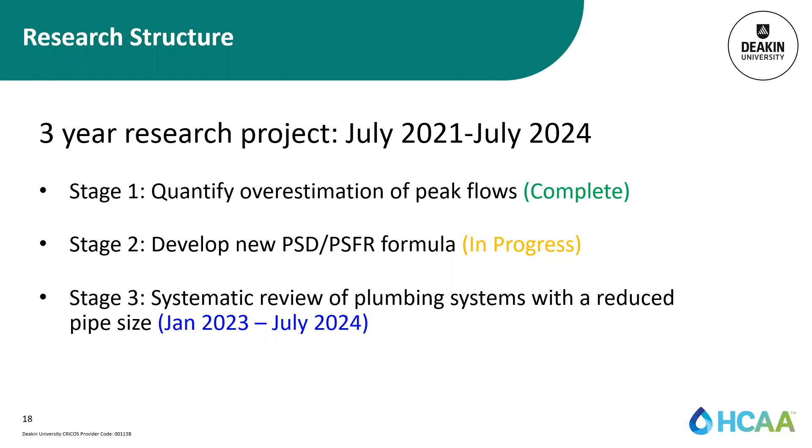Just a recap of stage 1 for those that haven't seen the results yet: we've monitored the water demand for over a year now in 4 buildings—3 primarily residential and one mixed-use commercial and residential. The results are pretty evident, as most of you probably already suspected, but we've been able to quantify that the Australian standard overestimates between 2 to 3 times the actual flows experienced in buildings during peak periods of water consumption.

We also did a few case studies looking at comparable international codes or methods for pipe sizing. We found that the DIN standard and the newly developed IAPMO water demand calculator were probably the most accurate. However, they tend to underestimate peak flows, which from our perspective may not be a good thing, especially when going down to smaller pipe sizes—a small change in demand can have a big change in head loss. So there's a caution when adopting different plumbing codes.

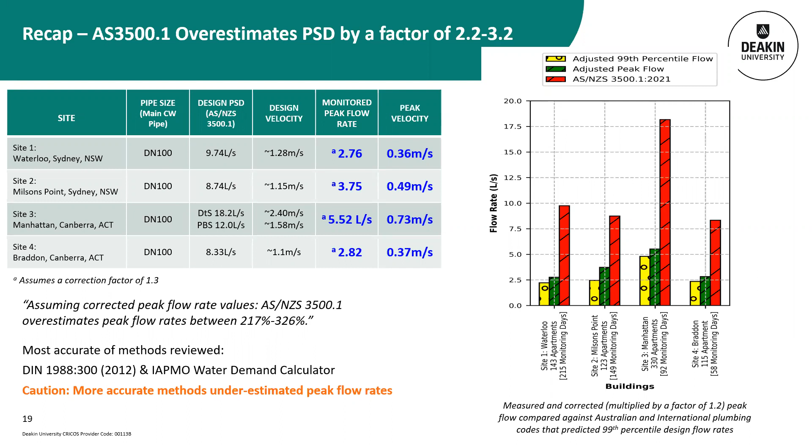Just a review of the publications—it seems like a long time now, but we've got some really good publications across a number of mediums. The first to come out was the ABCB Student Scholarship Report, which summarized the water demand data and did some hydraulic modeling comparing an as-sized system and an improved sized system, shedding some light on what the changes might be in the hydraulic conditions.

In addition, we also submitted a paper to the Ozwater Conference in 2022. Although it wasn't successful, it was nominated in the top 12 papers for the conference. We've also done an Australian Water Association interview based on our work to shed more light, so there's probably more of a cross between the civil side and the building services side, now starting to recognize that the systems are intertwined.

Just last week, a really big milestone from my perspective for my PhD studies is that the first peer-reviewed article was published in the ASCE Journal of Water Resources Planning and Management, a Q1, pretty high-end journal in the US. The paper is also open access, so anyone can access it—no paywall. To coincide with that peer review, we've done a SparkNotes version, an article published in The Conversation, essentially summarizing the research to date, the impacts, and the research needed moving forward.

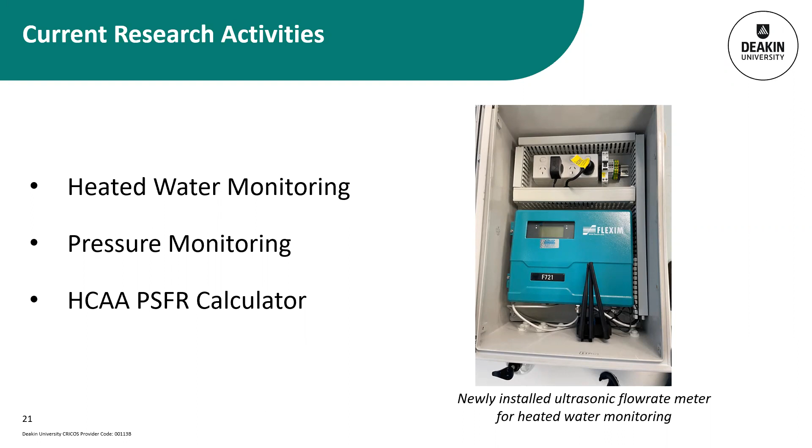Just to give a quick overview, this monitoring only began last week. We're monitoring in one building, looking at how hot water is consumed in conjunction with cold water, and hopefully we can spread this across more buildings later on.

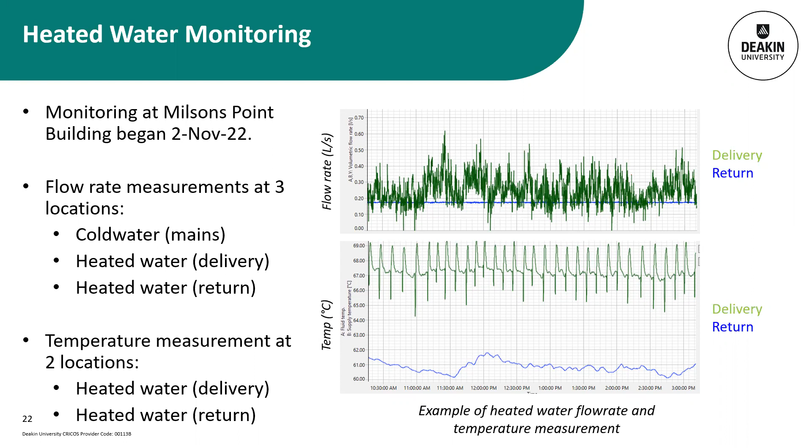In a similar fashion, I've got a pressure transducer and a water use log in my own house, trying to understand how each fixture in a normal household behaves from a water hammer or transient event perspective. There's some interesting findings already - successive events can raise the static pressure within the building, and we also see quick spikes. The charts show, in color, an hour of pressure monitoring.

Across in my house, you can see those spikes every now and then - they're a water hammer event associated with a mixer, washing machine, or similar. So the water hammer is quite significant inside an apartment or a normal single dwelling. I've just recently moved into a 6-unit block, 2 stories, and the pressure profile there is a little bit scary.

So I've left that off the chart at the moment - it got up to about 14 bar, or 1400 kPa. I think there's something going on with the heated water system.

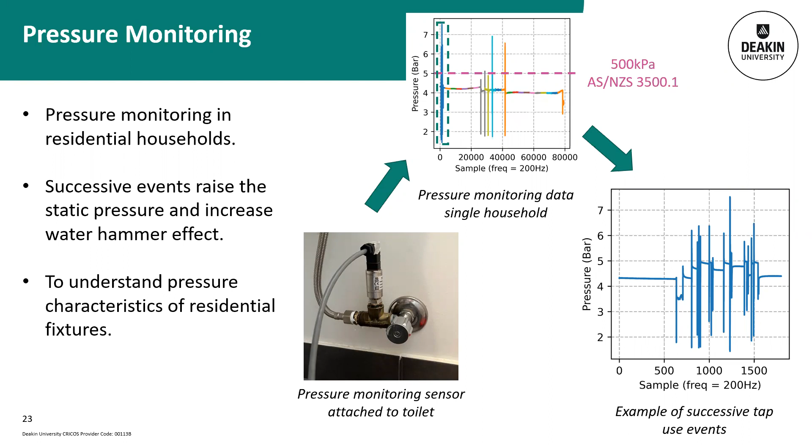Now probably the one everyone's more interested and keen to see: in the coming weeks, we're hoping to release a beta version of a spreadsheet for the association to use and trial, and do a comparison with other pipe sizing methods. We've adopted similar formulas to the IAPMO water demand calculator, but we've actually developed our own p-values, or probability of fixture use, derived from Australian water use data, along with a few little tweaks to the implementation.

The p-values will be a function of both building occupancy and the size or number of apartments at the same time, because we found that the p-value for a fixture isn't a linear or static value - it changes depending on the size of the building.

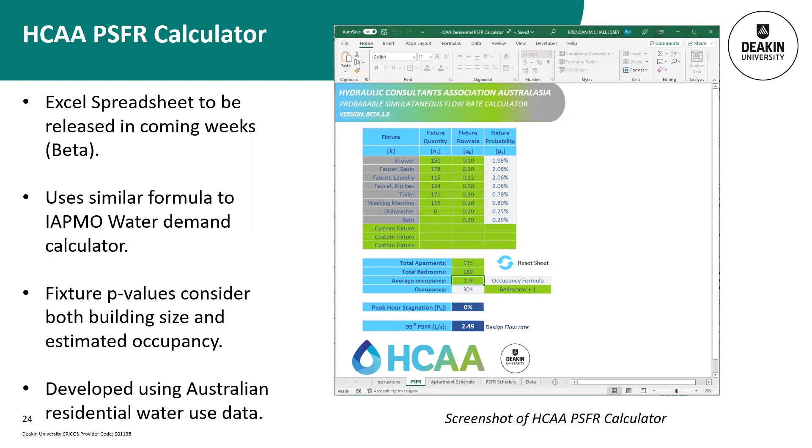To give some insight into how it's performing, we've completed a benchmark study, selecting a few different pipe sizing methods. The red line on the left chart is NZS 3500. The blue line is the newly developed method we've got in the works. There are a few others at the bottom with DIN and the IAPMO water demand calculator. You can see they're very similar, but IAPMO and DIN struggled at larger building sizes and tend to underestimate by around 50%.

As a general rule, it's around 25 to 33% of current flows estimated by AS 3500 part 1.

We've also conducted a case study of 4 buildings and sized appropriately for the cold water there, getting some pretty good results with a small degree of overestimation between 7 and about 36%. Results are looking promising, but we need to validate this further with monitoring more buildings and more water use data.

So it's a call out to industry - if anyone knows of projects that might be interested in installing a water meter, please get in touch. I know Tom's been doing some initiative with green buildings to try to get innovation points and get water meters on buildings that way. The more data the better from our perspective, that's how we learn.

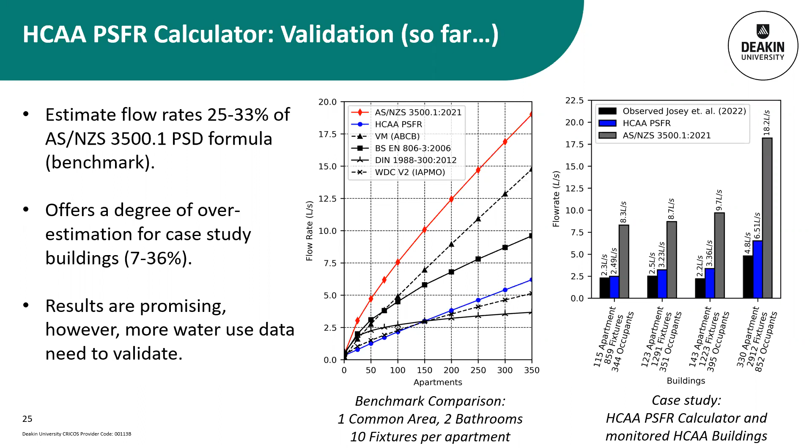So that's it from me. Is there a quick time for questions, or if not, you can come and find me afterwards and we can have a chat. But before people ask questions, I'll just touch on...

Just to give everyone a little bit more detail. The new hot water meter is one we talked about earlier this year, late last year. It costs about $8,000, and the association paid for it. It's the same German-branded water meter that we put on the cold water, but the cold water meters are about $4,000 per building.

So the old meters would do 5-second data, where the new hot water meter, which we put on the cold next to the older water meter to compare the data - these are all things Brendan didn't touch on - it will do 10 readings per second, so it's much more accurate.

That hot water meter filled up the memory bank, which is quite large, in 2 days, because we were doing sort of millisecond data basically. Now we're going to drop it back to 5 seconds so that it can last 14 days instead of somebody having to go and download it every 2 days.

Brendan, everyone probably heard over the last few years, but basically we're sponsoring his PhD. We're paying half of the cost with Deakin, so that's $33,000 a year, to give everyone a bit of insight into what we're doing.

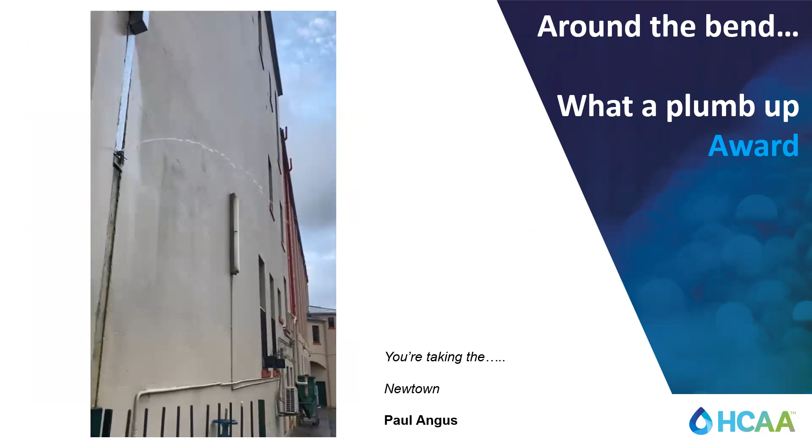Okay, now for some crazy photos. I probably don't need to look at these, they probably speak for themselves. It's quite a good one, this one. That actually might be better. That's sort of a reheat on a rad system there.

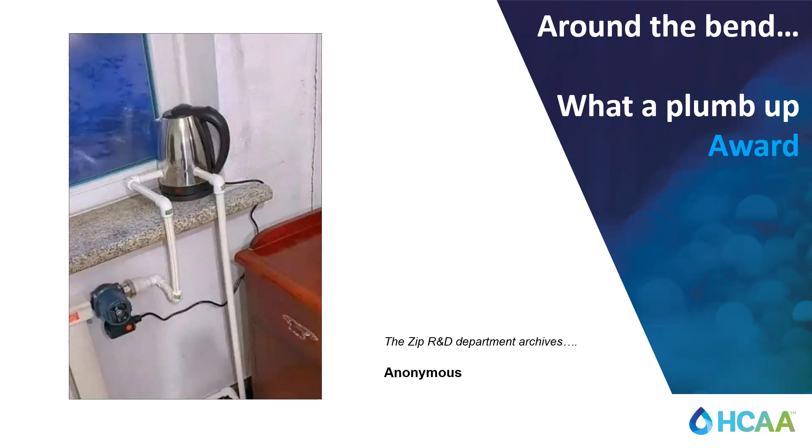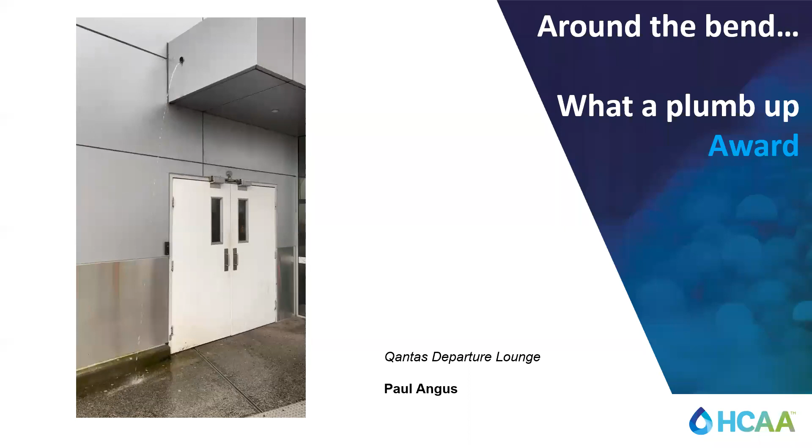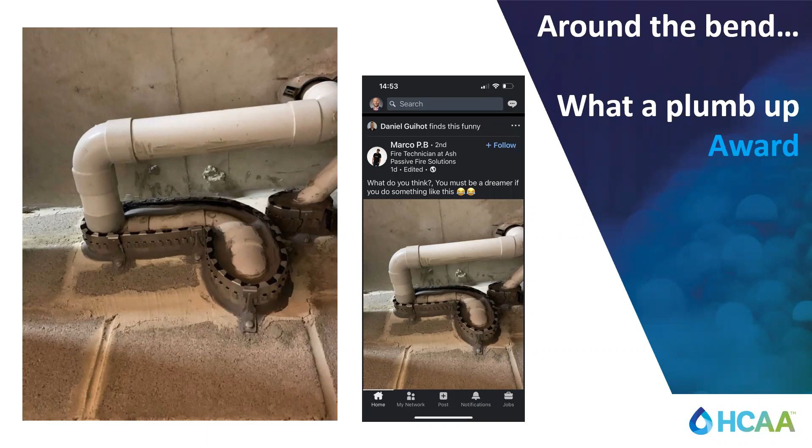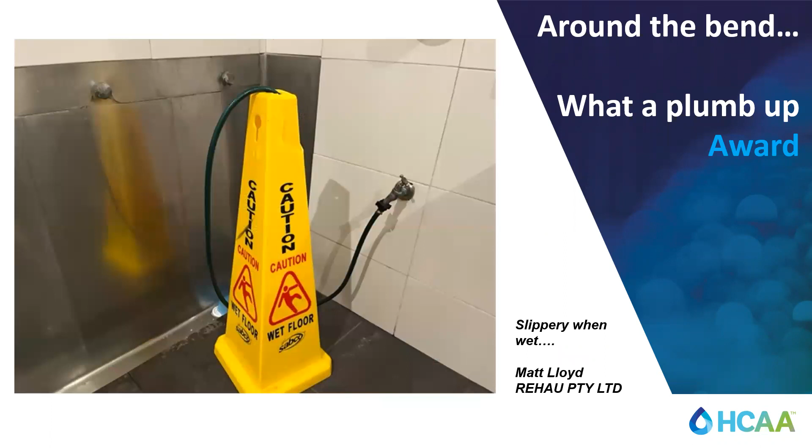Some interesting fire stopping. That's pretty usual. Some decent P trapping there, or S trapping. I'm not sure what's going on there. I know that one.

Welcome to the stage. Can't help it all. No, I'm good, I think.

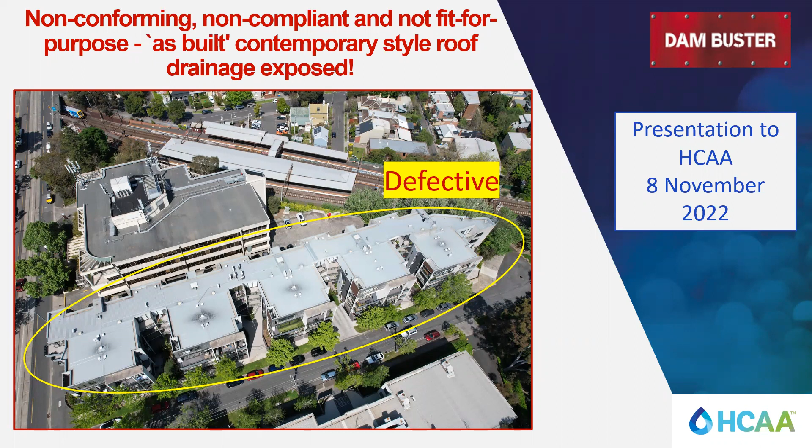So we get involved, and Rowan and I work together in this. He writes rectification scopes of works in relation to roof drainage, and we've been doing that for a long time.

Now, if you haven't seen this publication, it's really good reading, quite sobering though, and it came out in 2019, just prior to our current La Nina period. So when you're reading this, you have to remember that the data they collected was during less than average rainfall events in Eastern Australia. But these guys have done a great job - they've looked particularly at multi-unit residential.

Nicole Johnston from Griffith is someone I know and have spoken to regarding this research, and it's a really good research paper that looks at not just what's going on in these buildings, but also the ramifications for the people who live in them, the body corporates, and the dramas that go on in residential buildings.

Now, in this research paper, it breaks down the defects into a whole range of areas. There's a lot of guff there I'm not going to bore you with tonight. Basically, what it says is that the majority of problems with multi-unit residential buildings, of which over 2 million people in Australia now live in, is water ingress. And it says that water comes from either the cladding or the roofing or waterproofing areas.

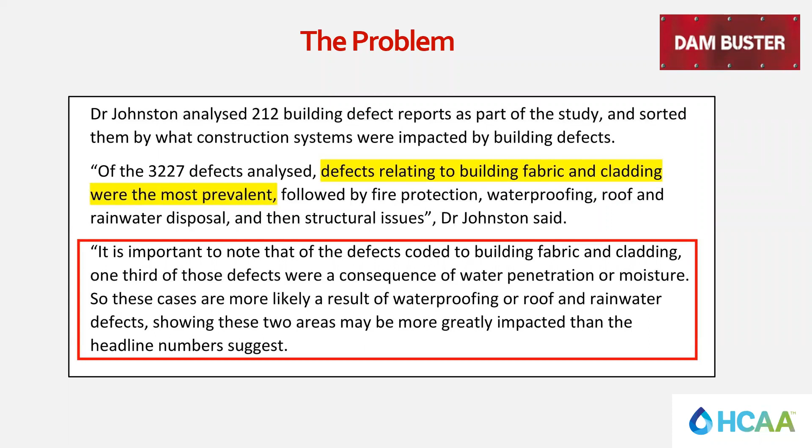Companies like Stramit, which we've had discussions with, tell us that their biggest growth area is flat metal deck roofs for domestic dwellings. So they're going, wow, we just keep pouring out these products, but they don't think about that those products, which are fine, drain into box gutters and rain heads, which they don't care about because they're made by flashing companies.

So if you go to the Stramit Book of Answers - and I'm bagging these guys out a little bit at the moment - you'll find that there are no answers for box gutters. They don't have any answers in relation to box gutter design. They stay away from it. So it's a little bit of a dark mystery area.

So what we're also seeing is that these rain heads, which are at the end of most box gutters - whether it's a sump or a rain head, it can only really be one or the other - are the choke points on the buildings where we get problems. And even though you guys probably all know that AS 3500.3 always draws a rain head or a sump and the box gutter as one, of course, they're not made that way. And plumbers never seal them.

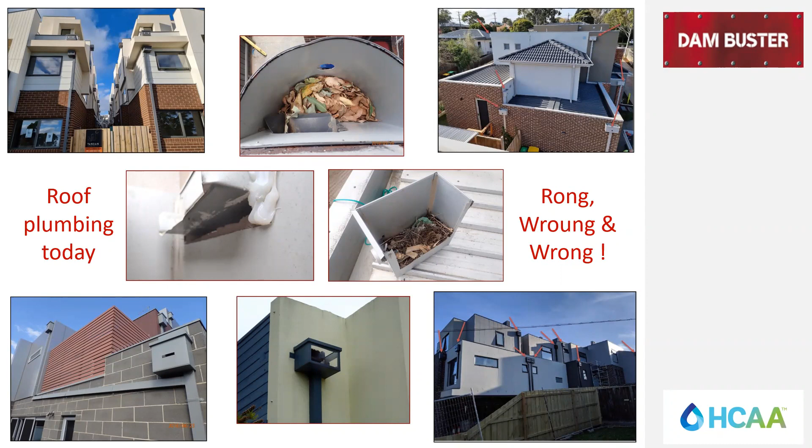His unit's flooding in a once in 1 year rain event rather than a once in 100 year rain event. So that's what I see.

Now, I could talk about defects all night, and I'm very happy to chat on about them afterwards. But what I've got for you tonight is opportunity, because that's what this is.

So what we're seeing in the defects is the failure to regulate by various authorities in Australia, failure to educate, and a lot of poor practice and education for plumbers particularly, and also for consultants in that way.

So this presents as an opportunity, and we saw this as an opportunity back in 2015. We developed a range of products which help people to be compliant and make things possible that weren't possible using Australian standards. We're just going to have a little look at that tonight for you guys and see what you think.

So the Dam Buster system, which is an off-the-shelf performance solution. You guys have probably all heard about performance solution. I would only imagine that if you're going to change the pipe sizes on buildings, it would actually be performance solution. So we set about creating not a program for performance solution, which was already out there - we created products, which are off-the-shelf products based on flow rates per litre.

We worked with a number of hydraulic professors, some of which you know, Terry Lukey, and also another guy called Robert Keller from Monash University, who is a bit of the godfather of hydraulics in Australia. He helped us out immensely, and we owe a lot to Bob.

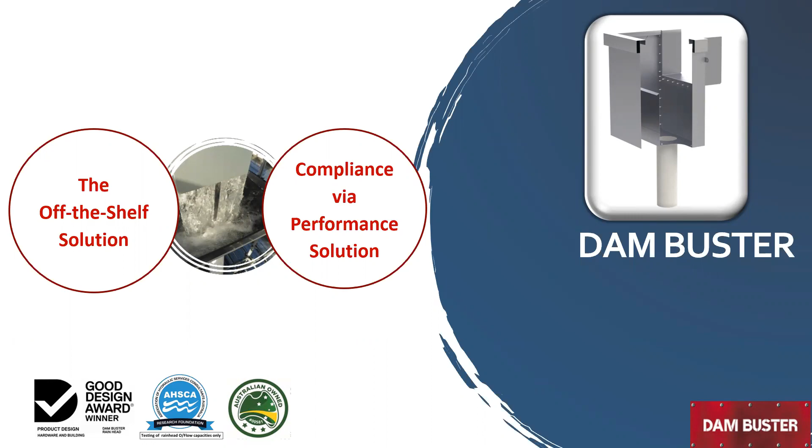There's been some recent changes. There's particularly a couple of things that happened in Victoria, which have a flow-on effect for Australia - HB 39, which is probably the only really decent flashing book in Australia, had this change made to it where they deleted figure 5.7.3. If you look it up in the Australian standards, you suddenly discover they deleted that in the middle of last year, which left just one rain head available for people to use in Australia. And if you're like me, you've probably never seen one of those in the wild.

Most rain heads as you see out there were like the ones that I showed you earlier - they have a small hole in them, pretty poorly built, and very rarely do they have any sort of mass attached to them, even though some people may have done that early on, like consultants like yourselves. We created the Dambuster Rainhead, which is on the right-hand side, a performance solution product based on flow rate per litre. That was the first device we came up with, starting the process of us working through how to try and resolve this.

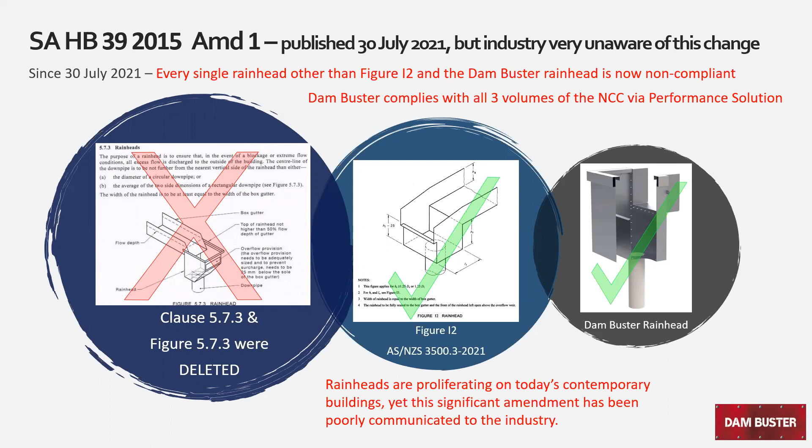Now, this grew out of necessity, as all great inventions do. Basically, we needed to be able to fix buildings that we were defecting. So we built this stuff.

There's a range of products now which are out there. They're all performance solution. There's enormous amounts of data built with Bob Keller and Terry Lukey in relation to this. And there are just three sort of versions there that sum it up.

You'll see the change of direction device down the bottom, which I've got a small version of here tonight if you have a look at. The Dambuster Rainhead, which is here as well - as you can see, it has an overflow through the base. Completely clean, makes architects very, very happy.

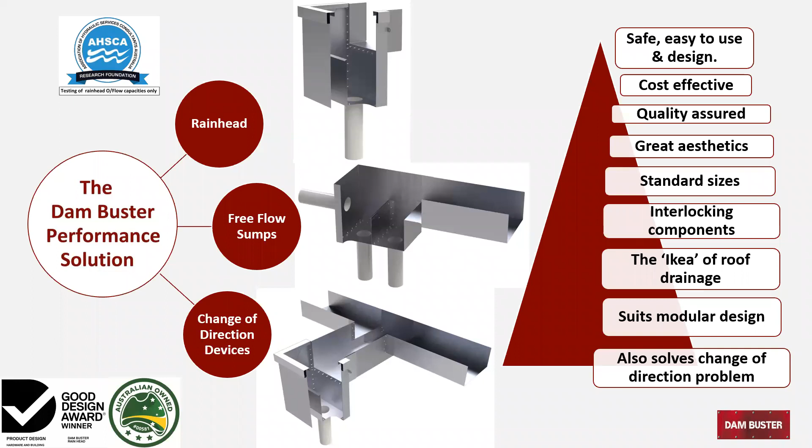Okay, so that's our products in practice. Now, if you can believe it, that was on a house which was leaking down on the Bellarine Peninsula in Victoria. That domestic dwelling had 16 changes of direction in the front face of the house. So we were able to redesign that. Rowan did a hydraulic plan for that, and roof plan, and combined it with a structural plan, which enabled us to rectify this pretty well unfixable house.

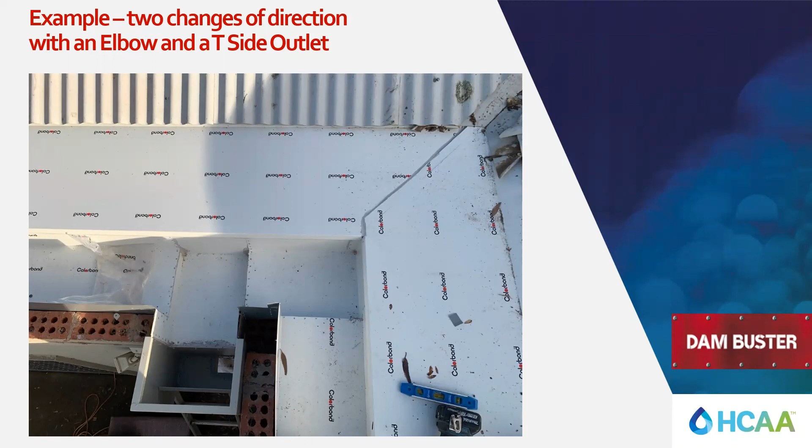People were very happy about that.

You guys are probably thinking compliance, because everybody does when it comes to these products. We've taken that into account, and on our website you'll find off-the-shelf performance solutions for each and every one of our products. There's a performance-based design brief which you can download for free, and there are state-by-state variations for the final reports in the technical downloads. So the performance solution side of this is free, okay?

I remember that. The products - we do not want to become the greatest manufacturer of rainwater goods in the world. We think of nothing worse. So we're in the business of licensing people to make our products across Australia. At the moment we're on a drive to get people to take on the licenses and go from there.

Am I talking too close to this? No, it's good, I was just getting a bit of feedback. Sweet.

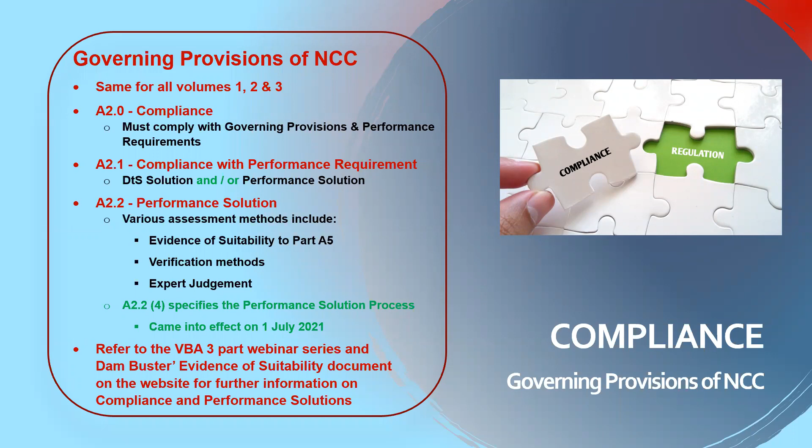Every Dambuster rain head has been tested up to 16 litres a second, and therefore even the smallest one, which I've got here tonight, is testing overflow at 16 litres a second. What that means is a performance solution - you can use a smaller rain head than the flow rate because it's going to overflow at once in 100 year outside the house. So there's a lot of little tricks that can be done. It's all on our website and in amongst the bits and pieces. There's a lot of clever stuff there.

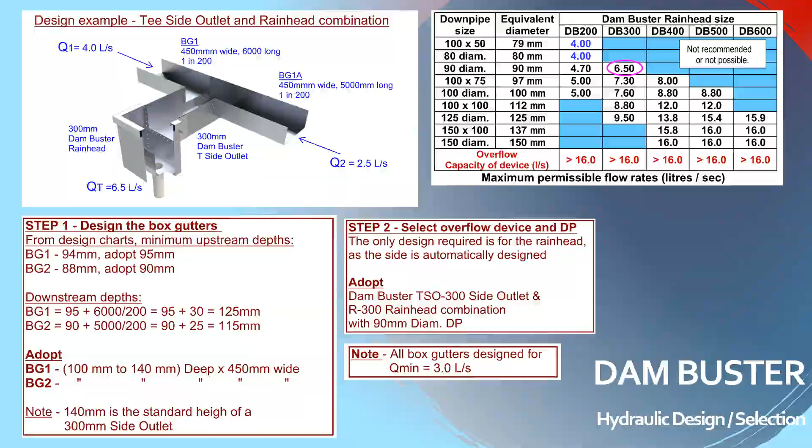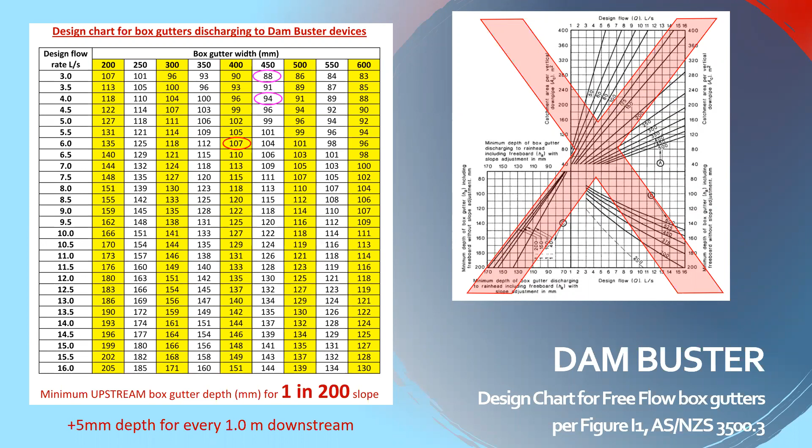All our measurements are the same because when someone's using our device, it's a combination of a performance solution and DTS. We needed a way for plumbers to size the box gutters where we weren't responsible for it. But what it means for you guys is you can quickly check if a roof is compliant or isn't, and size the system accordingly, very simply.

Here's a design example, which is one of Rowan's drawings. This is the kind of stuff we think you guys could make a lot of money out of, particularly with the changes coming, particularly in New South Wales, where the free-for-all of being able to sell non-compliant products into the market is going to be closed down in the next year or so, from what I can see.

They're going to do that by making people responsible in the chain, which will include you guys. That's where we see huge opportunity for hydraulic consultants. What we're seeing in Melbourne is that building surveyors, certifiers up here I think they call them, are asking for roof designs more and more often. So we need people to do it. Rowan's flat out, all the people we have to do this are flat out doing it. And it's pretty simple when you've got products which are off-the-shelf performance solutions.

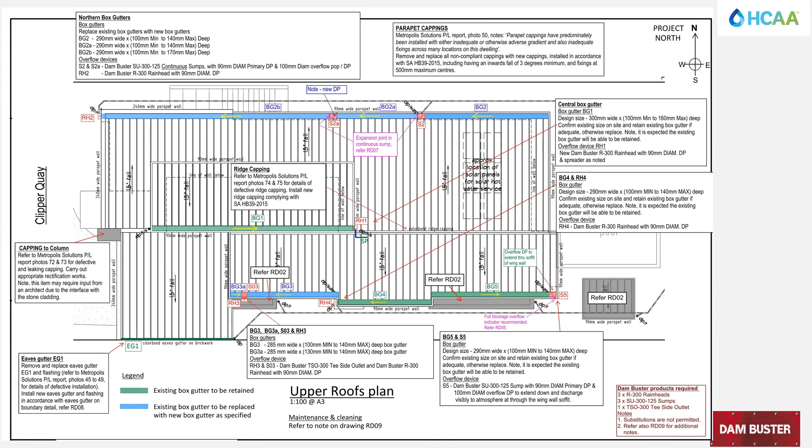Rowan, point something out. Yeah, so I just wanted to point out that when I started working with Russell a number of years ago doing insurance work, we had to rectify tall roof drainage, and it was very difficult using only the code devices. But with the change of direction devices, it's made it so much easier to rectify these buildings.

This is the kind of stuff Rowan produces on a daily basis. We hope people like yourselves could come in and produce this for the people you're already doing the hydraulics for on buildings. These buildings all have roofs, and they're more and more complicated these days.

So pretty simple drawings really, in the scheme of it. Using our products, you can actually build what people want to build, rather than telling them they can't do this, they've got to straighten that box gutter, they've got to do that. We just say, hey, yeah, we can do it, it's just going to change direction.

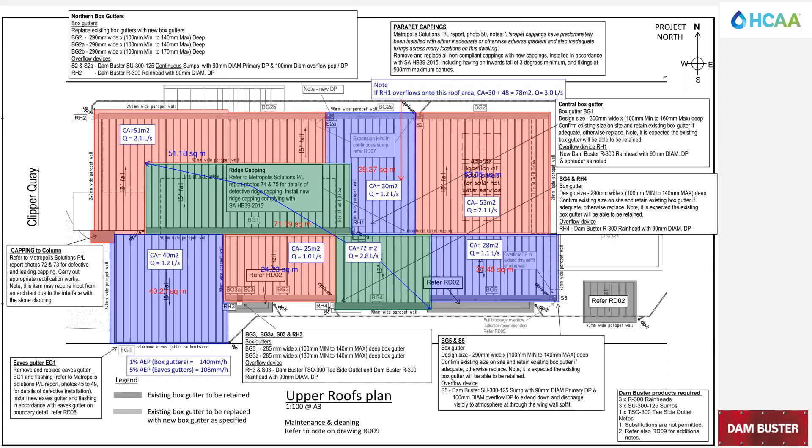We've also been starting to work with truss manufacturers to try to make some small changes to roof design on houses out there, where our products can be more easily used. And the benefits here, I know you guys are interested in this because of the previous couple of speakers, are the cost savings for people. Suddenly they can reduce the amount of drainage on a building, reduce the amount of rain heads, which are unsightly things at the best of times, downpipes, all that kind of stuff. There's a lot of savings for building design here.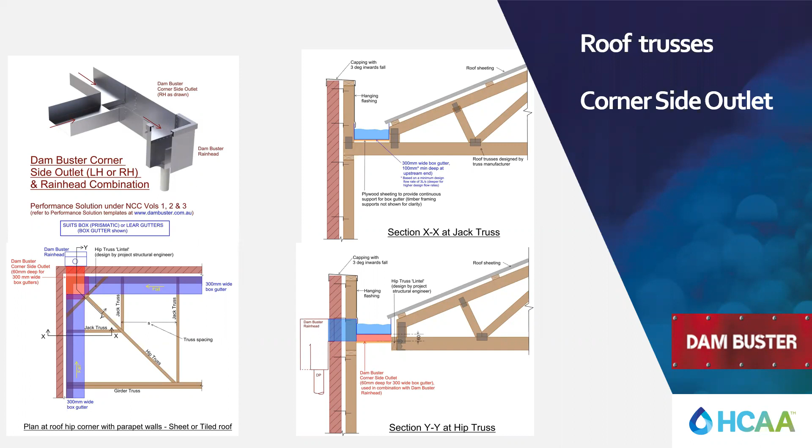So that's pretty well where I'm resting tonight. I've got a couple of products here. We would have liked to bring more up, but they're not the most user-friendly things to bring on a plane.

Basically the rain heads just grow larger. We've also stretched these products, so because they're a performance solution, we're able to make them wider as well. You can use the DB300 and stretch it out to 450 mil wide, which can keep the rain heads a reasonable size on buildings, a consideration for architects particularly, so you don't end up with great monstrosities on the side of buildings.

And the change of direction devices come in 3 different step downs for sizing: 50, 60 and 70, depending on the width of the box gutter.

Just the last thing I'll show you, which is kind of cool. Because we've moved to a performance solution—one of the other things the Australian standard says is you can't change the width of a box gutter, you have to go through the wall at the same size—our products have built-in slide. Because we're a performance solution, as long as you don't exceed the overflow flow rate for the rain head downpipe combination, there's no reason you can't. This is the sort of stuff we worked on with Robert Keller, we built rigs down in Melbourne, worked on this, and confirmed all of the findings. So more than happy to talk to you guys about that stuff, and hopefully have a look at our website and dig through that.

You're the kind of people that will understand it better than anybody, and particularly the performance solution data, I think you'll find really interesting. There is also potential to take this beyond 16 litres a second, which we haven't done at this stage, but if you guys are interested in that, we could.

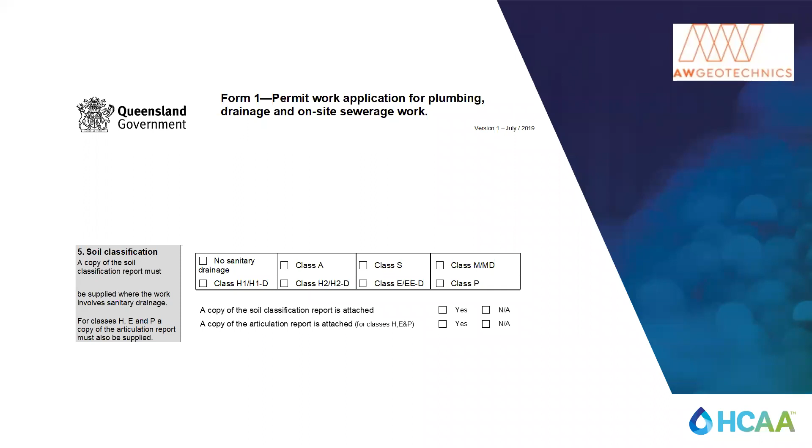Something that New South Wales is a little bit lacking, but so we actually, this is Queensland. So you actually have to tick one of those boxes. What is it? What is your soil class? Is it H1? Is it a P? Is it an E? And I'll get into that for people who don't really know what that is. And you also have to submit the soil report or the site classification when you go to submit your plumbing approvals.

So this is again Queensland. I'm not going to read it out for you. I can present this to you in simple terms. Basically, it says anything in Queensland, you need to do this. So anyone that thinks that everything is just an M in New South Wales is dreaming themselves. Anything that's H1, H2, E or P, you need to start thinking about plumbing.

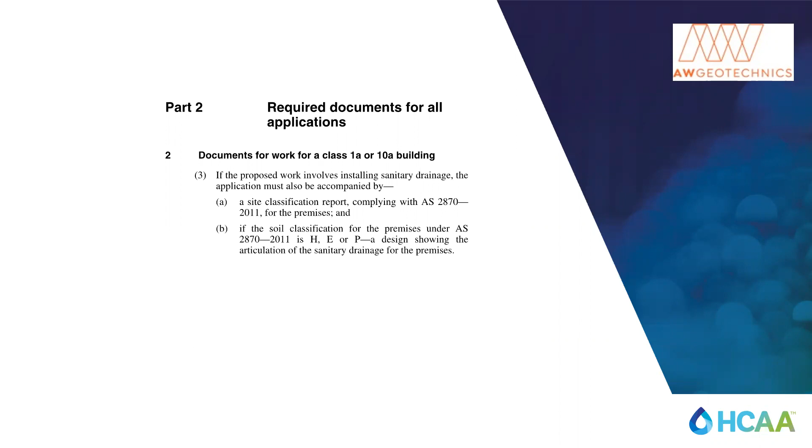I'm going to go into AS2870 because that's what I do. That's where I pretty much spend my life. AS2870 basically calls up class 1A or 10A buildings. And New South Wales, you don't need to submit an AS2870 classification because generally what happens is the builders just use the developers' reports. In Queensland and Victoria, it needs to be site specific. So basically every site gets tested. So it's only New South Wales that we generally deal with a developer's report or developer's geotech report.

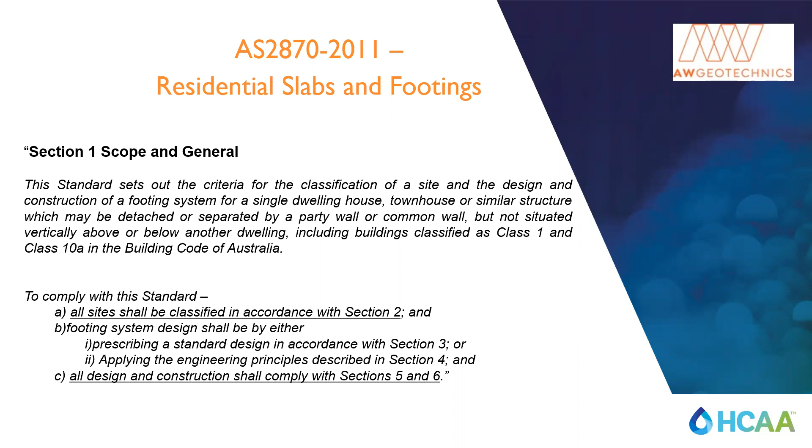So I just want to quickly talk about, because I know I'm short on time, so I just want to quickly point out some areas that New South Wales lacks in terms of soils. So what we have is site classification or a soil classification. Most councils in New South Wales, and I can go on about this all night, most councils in New South Wales will go, we won't accept a class P, we won't accept this, we won't accept that. So it needs to be called a class M, H1 or H2 in order to get registration.

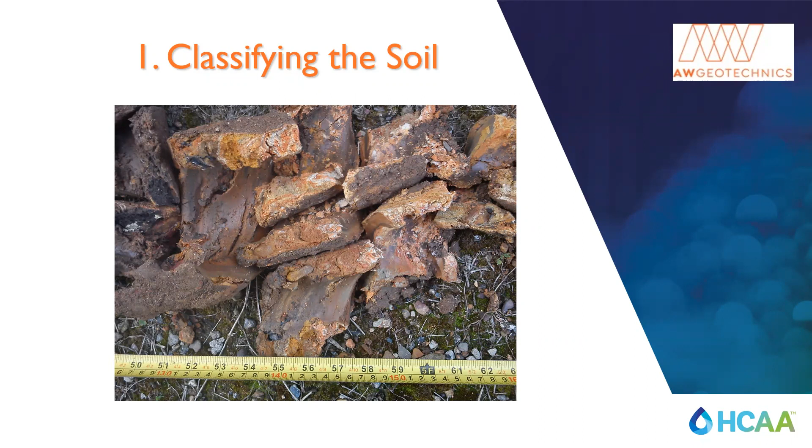Unfortunately, in terms of AS2870, that's not how it works. So you need to classify the site. So what we generally do is we'll go out, drill a hole. We'll classify the soil. So it's an M, H1, might be clay, might be rock, maybe shale, maybe fill, maybe whatever it may be. That's classifying the soil. Yeah. So we classify the soil. What is it? But then you need to put that soil into the perspective of what's happening on site. So you might have a class M soil, but you may, like this picture presents, you may have 30-metre gum trees on that site.

So what does it do to the soil? The soil may be class M, but it doesn't mean that it's going to behave as a class M. Because what's going to happen in this picture is the owner's going to knock all those trees down. And those trees may be sucking moisture out of that ground for the last 50 years. What do you think is going to happen to those clays on that site? All of a sudden it's been dry for the last 50 years.

We knock all those trees down, and anyone that's done anything in terms of slabs or housing, what do we do? We go put black plastic down, and we stick a slab on top. If you've ever gone in your backyard and thrown a tarp down, even when it's not raining, you walk out the next morning and there's condensation under that tarp. It's pretty simple, right?

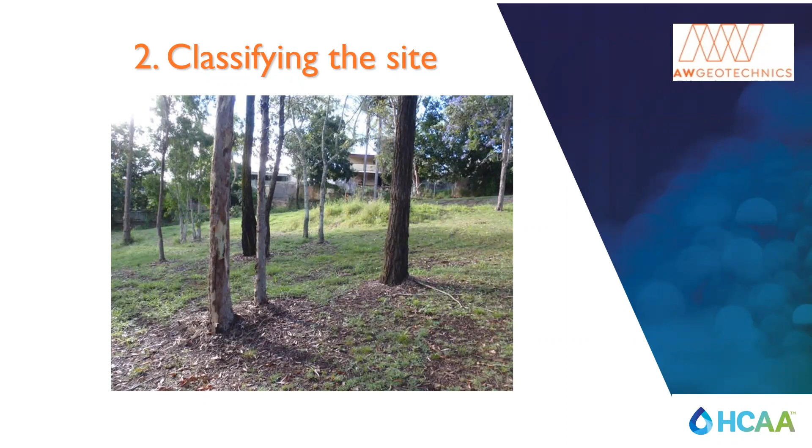Things change. We can knock all those trees down. It's not the same anymore. So maybe a class M, it may be an unreactive soil. Things have changed, your reactivity's changed. So for most of you guys, you should know most of that. I won't get too much into it.

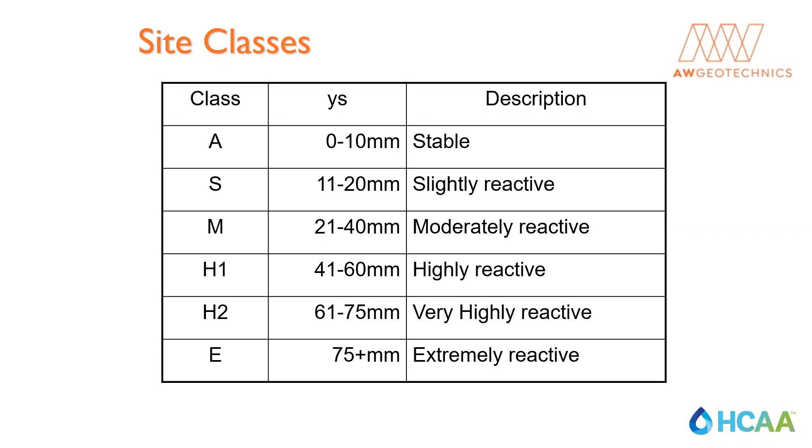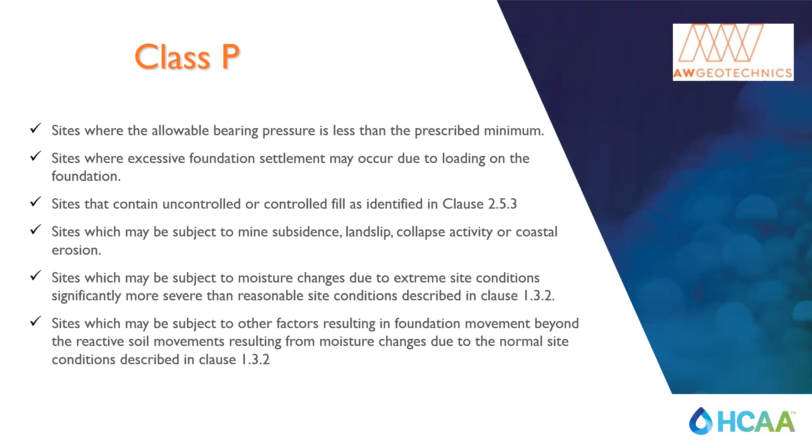So what can cause moisture change? This is in the code, it's been there since 2011, nothing's changed for 12 years. So this is Class P. Prior to construction: removal of the existing building, removal of trees, presence of trees, unusual moisture conditions caused by drains, channels, ponds, dams, swimming pools, effluent disposal areas, tanks. Mate, you could go on all day.

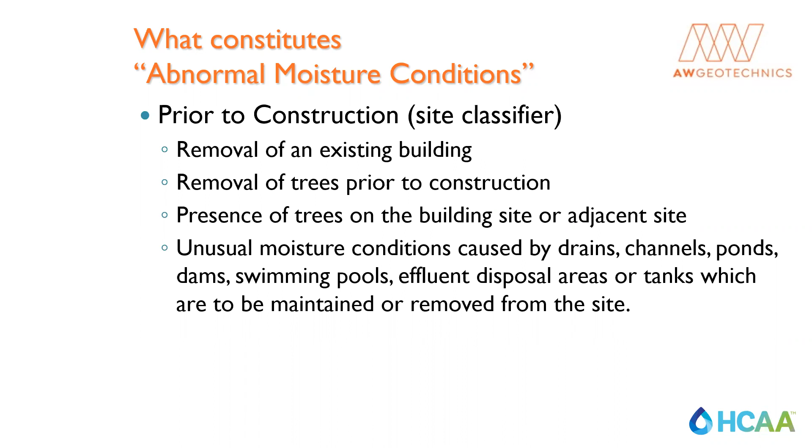So this is Class P. As soon as you've got one of those, you're Class P, automatically. It's been in there since 1988 in the code. Now I know I'm talking to the guys that generally deal in 3500, and this is why I've been invited in. I'm not trying to scare you, but this stuff is what we're looking at here.

Now we go to the next point. So Class P resulting from construction: failure to provide adequate site drainage. How many sites do you guys rock up to and there's no temporary downpipes, anything like that? Failure to detail construct drainage. I don't think I've ever seen a detailed drainage design from New South Wales.

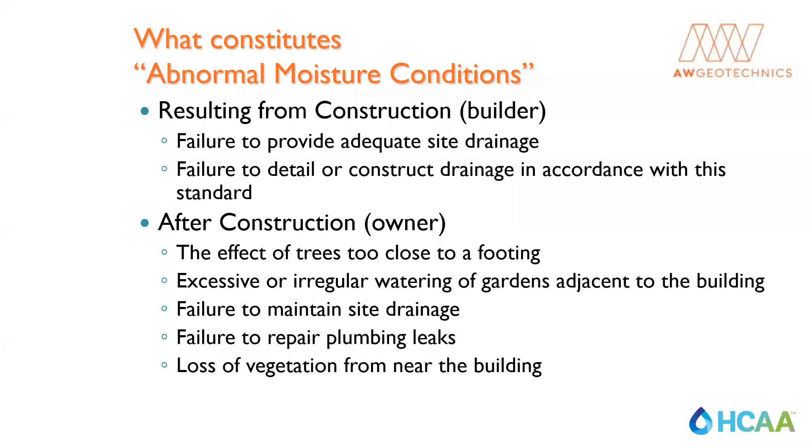After construction, so this is for the homeowner: as soon as they plant a tree, that's it, your site classification's gone. Failure to maintain site drainage, failure to repair plumbing - that's pretty standard, but I think you guys all understand that.

I'll go to reporting because this is something that really pet peeves me, because we just don't see that in New South Wales. And keep in mind, I do between 600 and 900 homes a month in Sydney, so I'm very familiar with what you guys do.

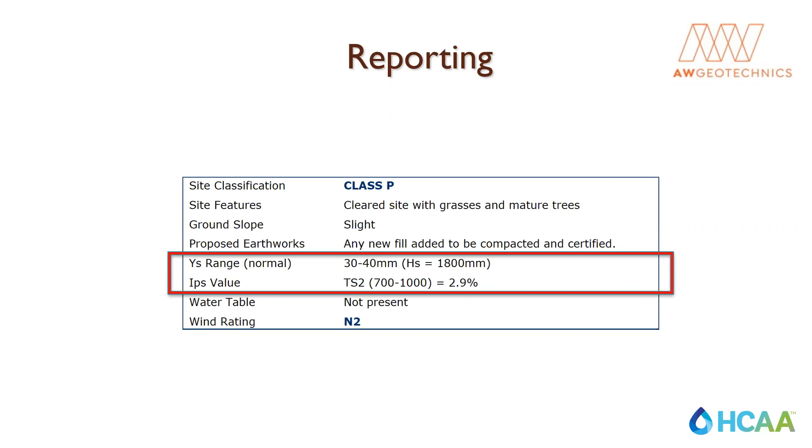So your Ys is the most important thing - that's your movement, that is your predicted movement on site. So I've just highlighted that there. Yeah, Class P, yep. But now we're going to go into what happens.

So we've got a Class P because of the trees. So what happens in Sydney is that site wouldn't be developed unless it's not called Class P. So what happens from councils is they say, you can't call it Class P, otherwise we won't register it. So what the developer does is they get the geotech in, they do the site classification, and always in the report it says it has not considered trees, it has not considered the effects of trees, and therefore we've called it H1 or M or whatever it may be. Well, we're not going to think about that, because otherwise Mr. Land Developer is not going to get registration.

So all of a sudden the owner buys a block of land that he's been sold as a Class M or as a H1 or a H2, whatever it may be. And then I turn up and go, mate, you've got 30 metre gum trees on there. According to AS 2870, that's Class P. And he goes, but that's not what I was sold. And it just goes round and round and round, but all of a sudden I've become the bagger. So this is generally what we would do.

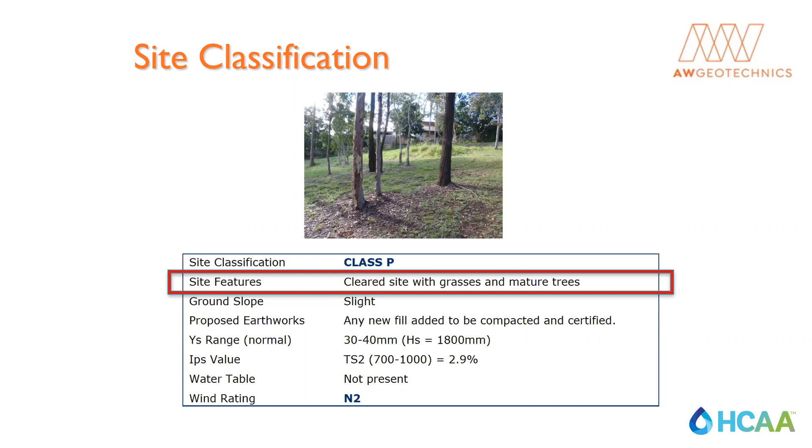So this is Class P. As you can see, recent removal of large trees prior to construction, growth of trees close to a footing. You guys understand that's pretty simple.

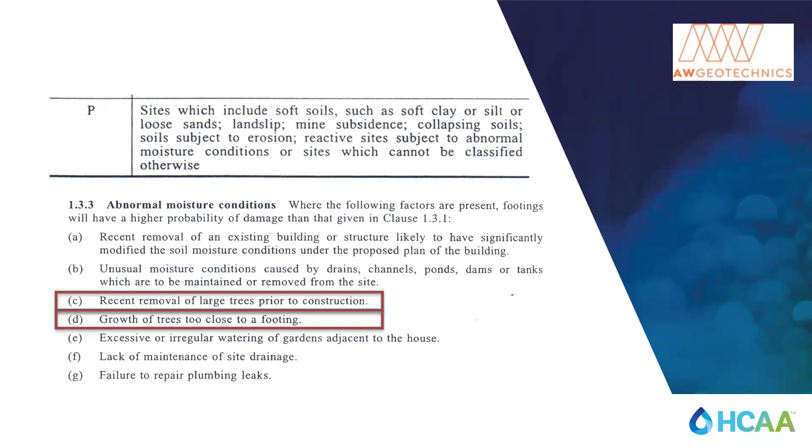I've done jobs literally where, I think it was at Kellyville, there's a 30-metre gum tree in the middle of the site, and the geotech for the developer called it Class M, because they need to do that to get approval. Anyway, Class P, move on to the next one.

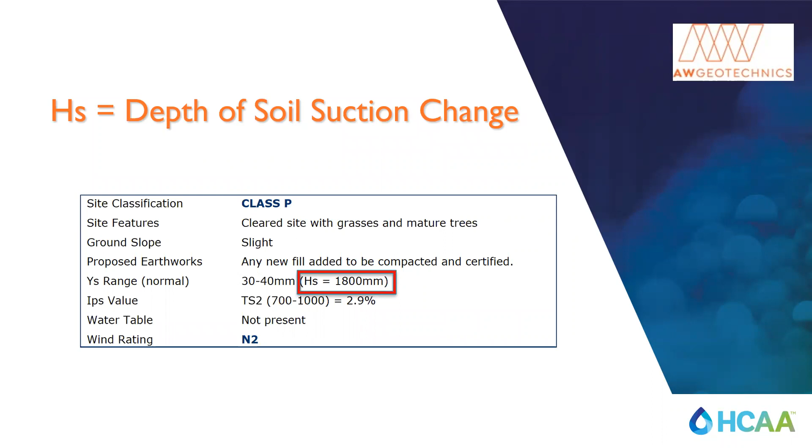Your Hs, I won't get too into this because there's only probably about a dozen people in Australia who understand what Hs is. But I'll move to the next screen so you can figure it out, because this is a plumbing thing. So basically your Hs in terms of soils is

your rainfall. So your summer, spring, autumn, winter. The depth, where the arrow ends, is basically the depth that your seasons can affect soils. Does that make sense? Raise your hand if it doesn't, because I'm happy to answer questions. But basically your Hs is where your rainfall or your seasons, for your suburb, for your state, for your area, affects the moisture change in the soil.

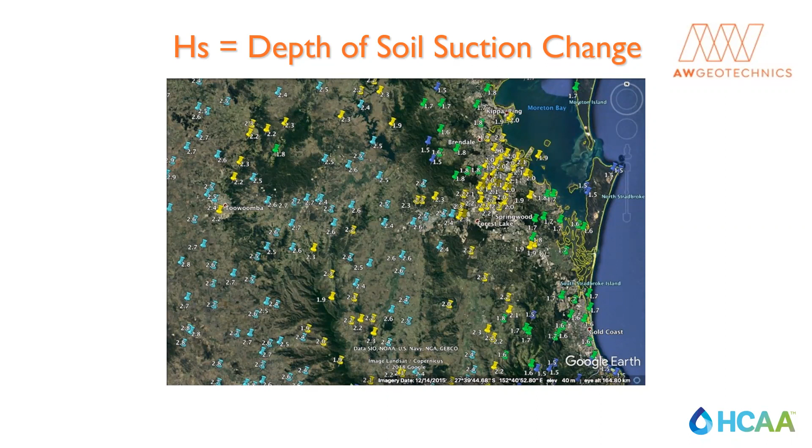I'll move to this one because this is a really good example. This is a Sydney job where we've taken a moisture profile on 4 corners of the house. In Sydney, generally you guys work off about 1500 or 1800 Hs. If you look at the surface level, right at the top, you can see the difference in moisture change from borehole 1, borehole 2, borehole 3, borehole 4. So think of 4 corners of the site.

And then as you go down, you can see that it all starts to line up, the moisture starting as it goes down. We drilled down to 5 meters and it's all pretty much, after about 3 meters, fine. But what I'm trying to get to, if I just bring this one back up,

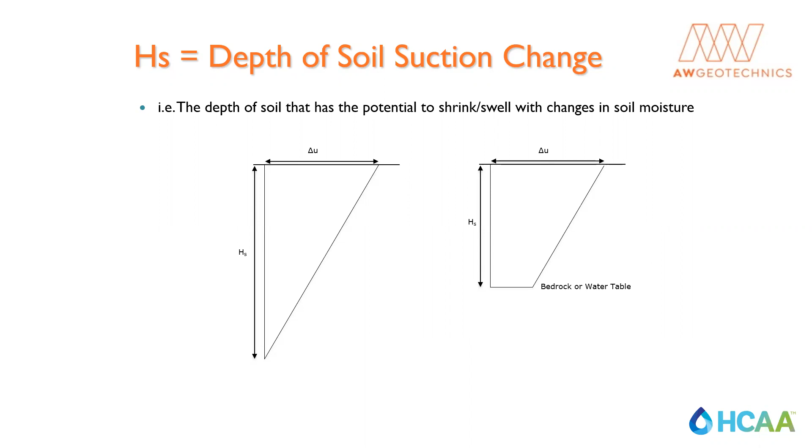your plumbing is at 300, 400, 500, 600 mil. So on that triangle, where's all the movement? If we go back here, where's all the movement? It's in the top half meter. Below that, there's nothing.

So this is where the plumbing becomes really important, in terms of designing flexible joints, expansion, everything like that, because that's where all your movement is, up the top. Below that, guys, if you want to put your plumbing in 2 meters deep, I've got no problem, it's not going to move. But all your movement due to seasonal variations in terms of soils is there, or in terms of homeowner watering the garden on one side, not watering on the other side. That's where all your movement is, in that top meter.

And I can design a slab that can deal with that, no problems at all. But PVC can't help you. And this is where I know they tried to get it in the 3500, and it's in Appendix G. Thank you, Chris. Appendix G. This is where all this stuff is leading.

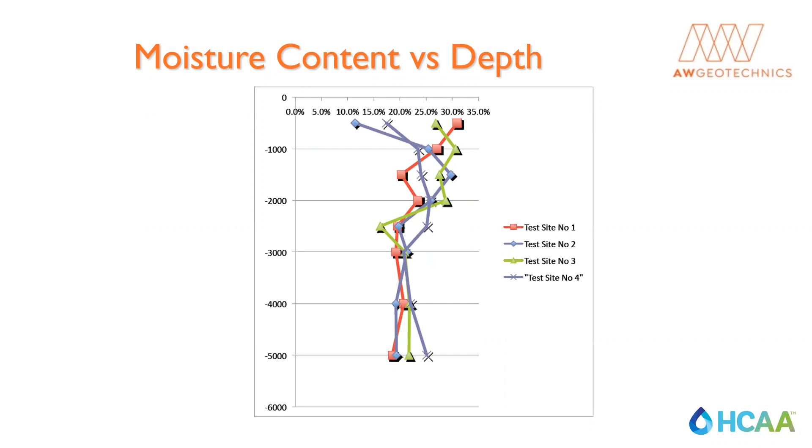So this is what I deal with, this sort of stuff where the plumber comes in, digs a big hole, fills it full of gravel on clay soils. Can anyone guess what's going to happen here when it rains, when it gets water in there?

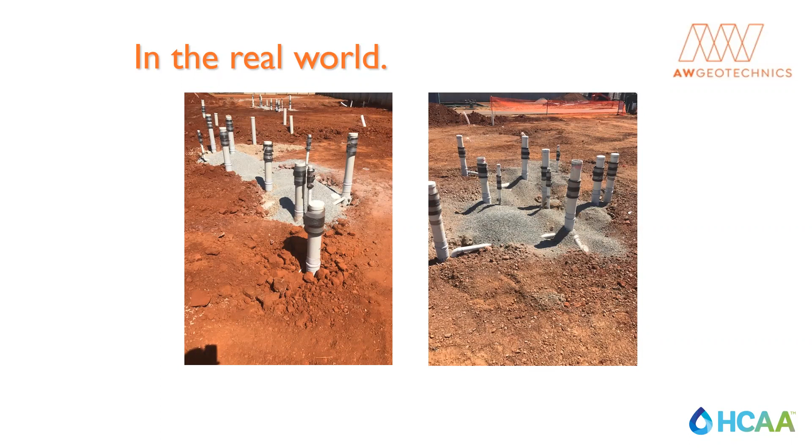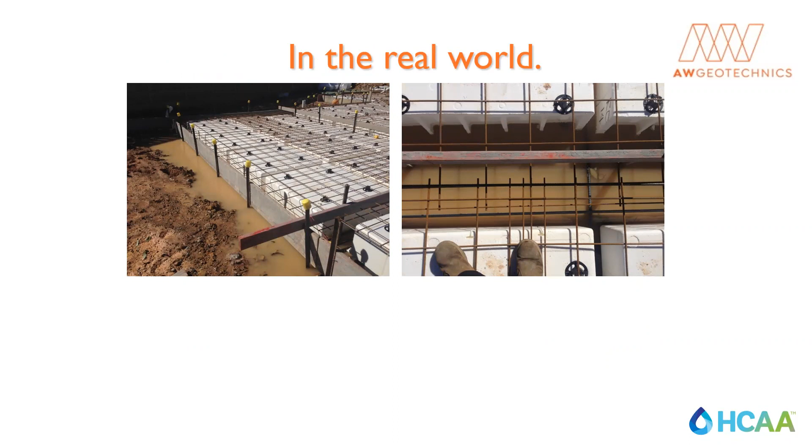This is pretty much day to day. You can't even see the bottom beam there on the trench mesh because the drainage is always just terrible. I'll move on because I know I'm running out of time. Angle of repose, you guys already know about that stuff.

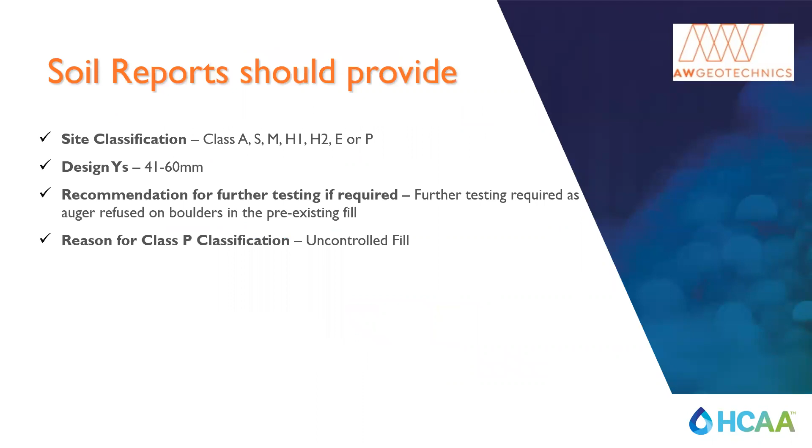So this is AS2870, which has been around since 2011. I just want you guys to look at that and tell me what you think that implies, or question me on what you think it implies. That's been around since 2011, and that is actually part of the NCC. So I don't care whether it's referenced in 3500 or not — AS2870 is in the NCC.

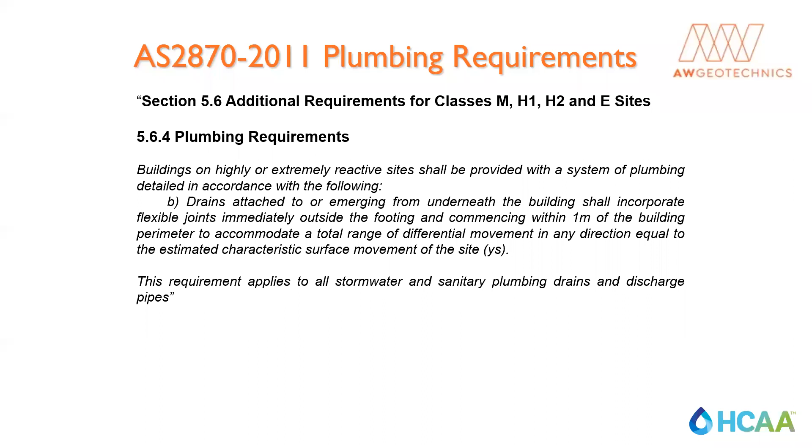And keep in mind, Victoria and Queensland have been doing this for 10 plus years. So, am I boring you yet?

I just wanted to bring this up because I know you guys down here — and I was probably one of the first to find out about a certain suburb in Sydney that's having problems with fill. I don't really want to mention it, but it may be a suburb called JS or somewhere around there, if that makes sense. I'm not going to confirm or deny anything. But I just wanted to bring up the problems around the suburbs you guys are having at the moment around fill, because I know a lot of you talk about stable, unstable, but you don't talk about reactivity or anything like that, right?

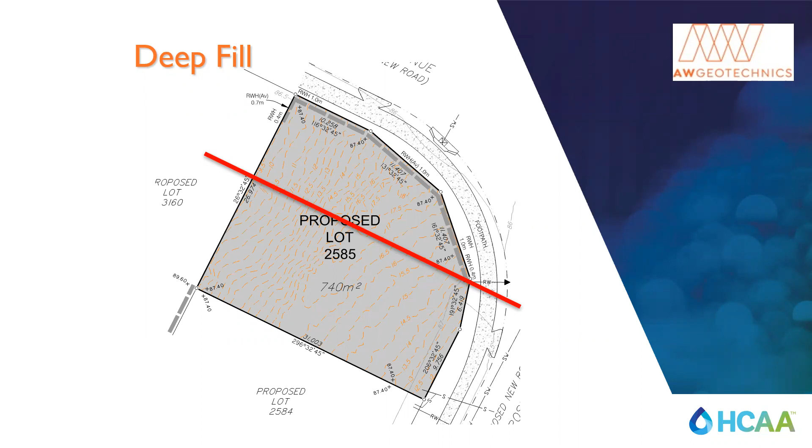So that's where it is. I drew it off contour. So you're looking at 17 meters in the middle. One side is, what's that? I can't see from here, about 10. What does that look like to you?

And what's the problem out in that estate that I didn't mention? But I did, sorry. What's the problem out there?

You cannot put fill in an area where water runs, because guess what? Water's water. It'll go where it wants to. And we cannot put fill into a gully and go, oh, water's just going to stop going there. Does not happen. Water is a funny beast, right? And you guys know this more than I do, but it will go where it wants to go.

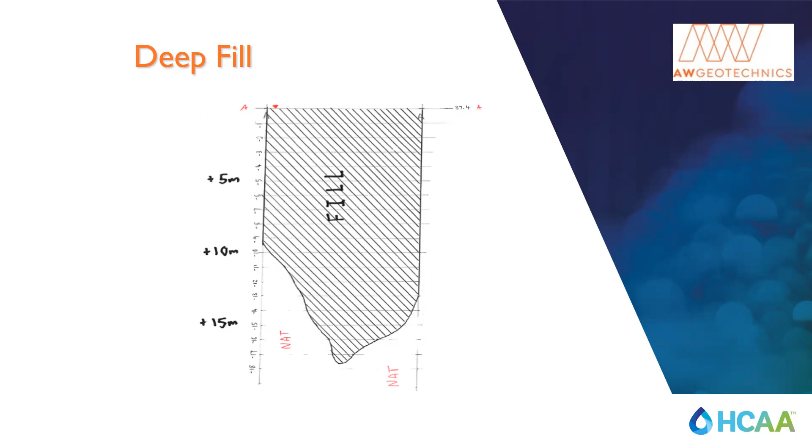This is 17 meters, 18 meters, I can't see it, but 18 meters of fill. Now this is the last bit of my presentation. Let's go stick a house on it.

And this is what's happening, so this is what we're dealing with. Let's go stick a house on it. What do you think is going to happen? So 1% consolidation of the depth of fill.

Let's go stick some plumbing pipes in there. Oh, she'll drain, first day you put it in there. But hang on a second, all of a sudden the fill's now loaded. Oh, hang on a second, she's starting to get a bit flat.

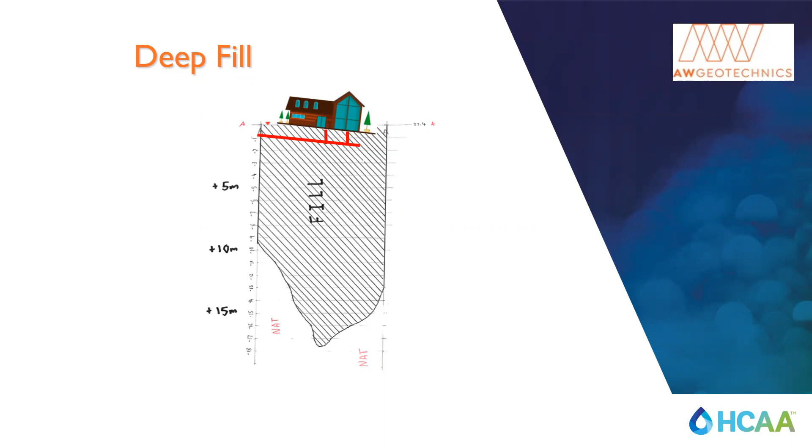And this is my running joke with a lot of builders I have, because I've been to a few sites where literally the bathtub was on the wrong end of that. So all of a sudden, every time they pulled the plug out of the bathtub, it didn't drain. What do we do? We pile it.

But again, like you said, does a homeowner want to pay for that? No, they don't want to pay for that. But at the same time, we can pile it, but what do we do with the plumbing? This is what's important, because that's livability, you know, it's amenity. So if you can't create amenity, what's the point of having a house?

I was out at a big builder this morning, and yeah, they're starting to freak out about this stuff. So I suggest if you guys want to have a chat, talk to Chris out the back. I'm not a plumber, in terms of requirements, stuff like that.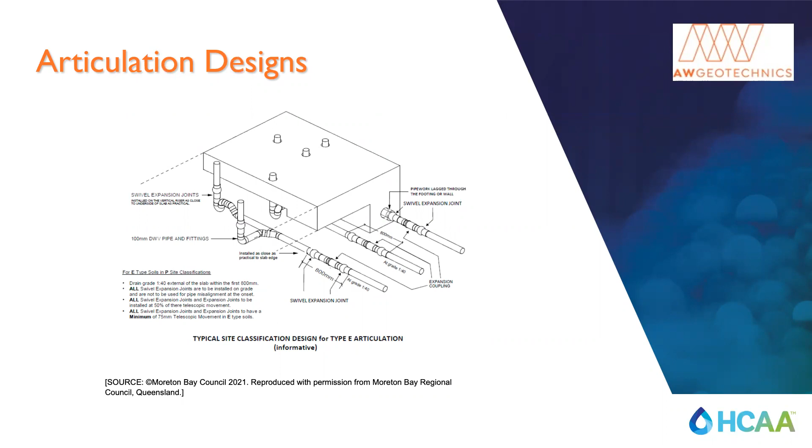But because he couldn't get fall, see the back jump up where it's on a 45, he put the expansion there because he couldn't get the expansion on the jump up.

So basically, yeah, I can't fault him because he actually was trying his best, but that's what happened, based off all these bathrooms were off the back of the house, and he only had about 300 trench to deal with to get it in.

So he couldn't get the expander in, so he put it on the 45. I mean, I couldn't fault him, he did the right thing. He tried. And that's all I've been telling my builders, if you can show that you're actually trying, this isn't an issue.

But yeah, 12 houses all in a row, and that's what we're dealing with. All just as soon as the clay got wet through all the rain, man, straight up.

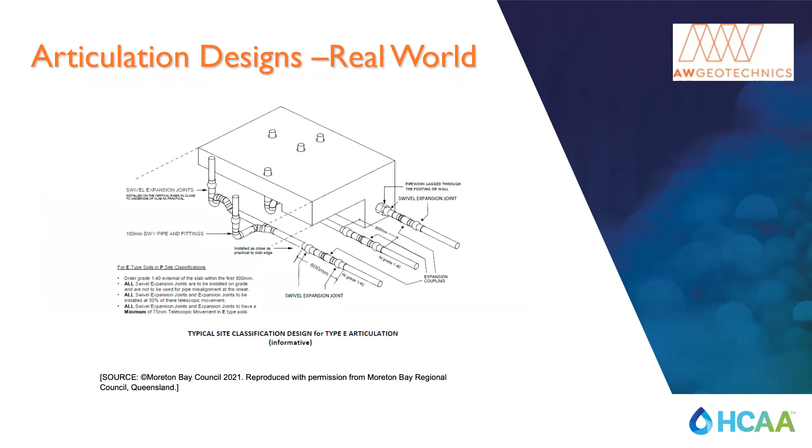Something on that, so is that push drainage up? Yeah, yeah, so that's swell from the rain, in the shower, yep, on the back section of the house. And most of the time that's in a cut.

So the back section generally these days is on a cut section, so they cut down and they just don't have the fall. So all that rainfall came through and just popped. As soon as the clay swelled, it just popped everything.

Is that it? Anyone else? Otherwise, you can come chat to me anytime. I'm sure you probably want to get to dessert. You're right.

At any stage, that scenario with the fill, would it ever settle? Would 5 years, 10 years be enough, from a geotechnical point of view? As soon as you load it, that's it - it's going to go. It's exponential. So as soon as you put a house on there, it's going to settle fast.

Then it'll slow. If you get rainfall, which happened at my mate's house - I got a phone call. Literally the second story brickwork wasn't even up, and they called me. This was 7 years ago. They said, 'Jason, you need to get down here right now.' Sydney had 200 and something mil over a weekend, and it went. This entire house didn't even have a roof on it yet - 140 mil. So, differential settlement.

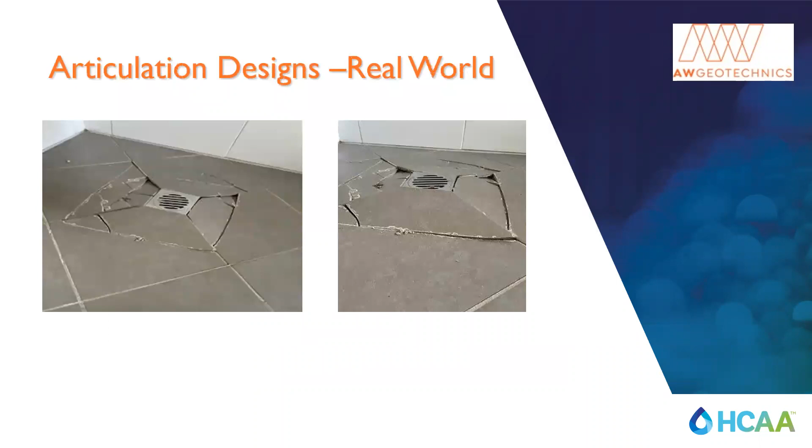Exactly, yeah. But I think what you're saying is you might create negative fall in certain aspects, and you're 100% right. But the problem is, I'd prefer negative fall than a cracked pipe, especially in fill or unstable ground, because as soon as you put water in that, it's going to multiply 10 times. So yes, I agree with you, it's still going to create negative fall, but there's only so much a plumber can do, because often on sites now they're so flat, they've got no grade to get to their jump ups or whatever they need to do.

All they can do is ensure that it's put in, but eventually you're going to create negative fall. It's the same with AS2870 regarding pathways - the pathways on the perimeter of residential slabs are supposed to fall 1 in 40. But if you're on a Class E site, they literally go like that, and we can get to a point where I'm not sure how you deal with those grades.